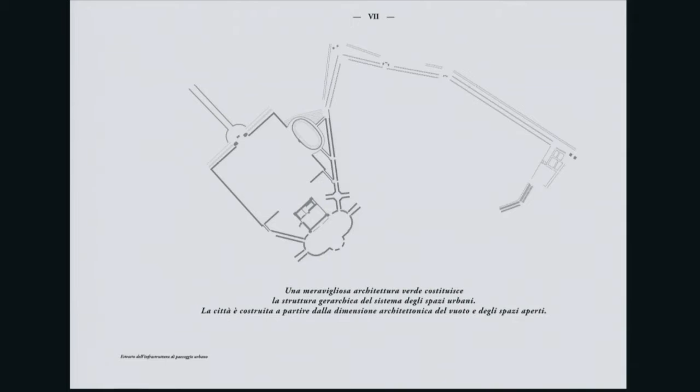This is a zoom on the part from Porta Venezia, close to the center, to the area of the castle. What is special is that the landscape system is made by trees, and they are not merely designing a line following the street, but producing a double or a 4-line system, which creates rooms instead of just being lines.

These are some studies we made, some elements. Many of you know Via Marina, for example.

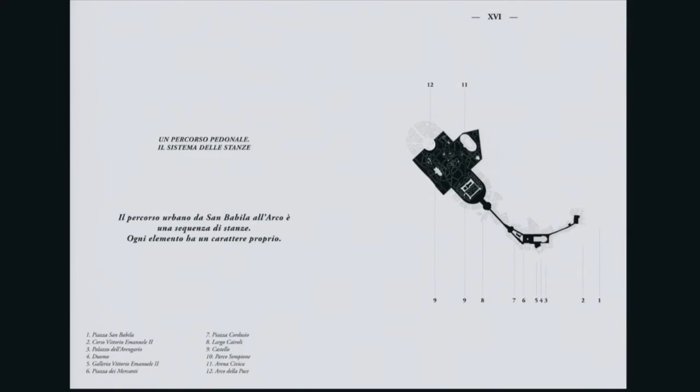Then we started an operation. The investigation was about finding the limit of the project. It was not just the problem of the road, as the administration thought—and we guess and hope they're not still thinking just about the traffic problem—but to find the dimension of the void, because we thought that in the end, void is the dimension and proportion of the urban space.

So we consider a huge area as a unique system, which is a strange space that goes from San Babila to Parco Sempione, made of objects in the void.

Historical examples demonstrate that this isn't a problem of us being obsessed with landscape, or about the antithesis between nature and artificial elements. The history of this place shows there's no contraposition—they were working together, with a special quality, character and atmosphere, even when it's a void made of natural elements.

It's a very urban space. These are other elements from Collezione Bertarelli.

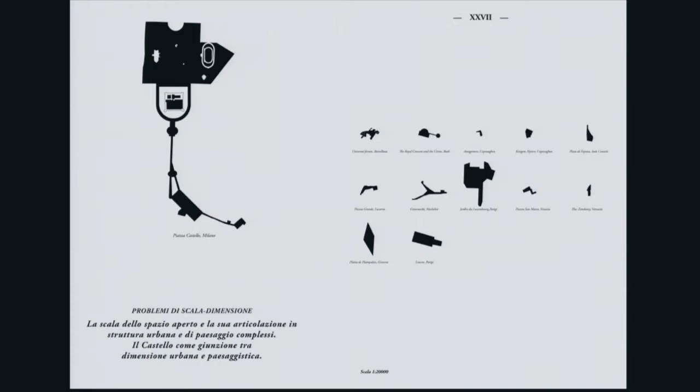Then we made an investigation about the dimension of that space, considering the huge area. On the right you see examples of different piazzas in Europe and the world, to set up the scale and dimension of our project compared to other cases, including the huge scale of the void compared with other void spaces.

This is the project, a three-dimensional vision. This is the existing situation, which is very linked to something we want to avoid—just the dimension of the urban furniture or element.

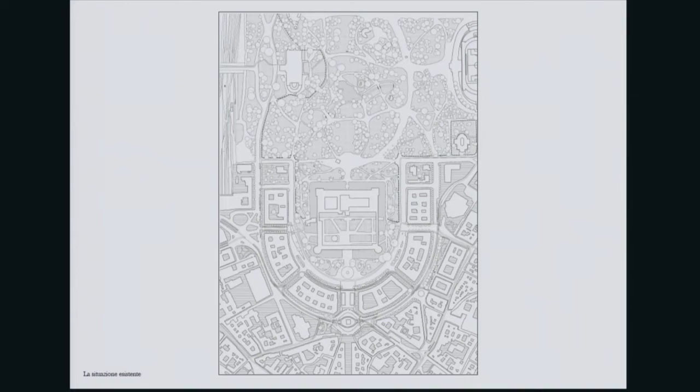The south side of the castle is actually a garden without any real quality, just made of small scale elements, while the Alemagna project is really finishing on the north side. We propose a unique element which connects all space using the void as a structure.

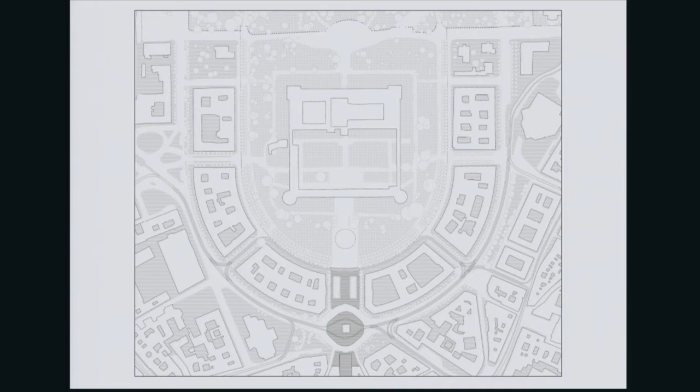We continue the element around the castle with 4 lines of trees, producing rooms and spaces to be lived in, and we left the void to be the real place. The history is kind of strange, because the consultation asked for a tiny project—just a 300-meter element—with the real problem being traffic, just to do it very fast for Expo.

That's why what you see here in the castle now is just the arrangement of a little space. What we proposed to the administration was to stop with urban furniture or fast, short, temporary development, stop wasting money, and to produce a project with an urban scale and urban perspective, also in terms of time.

I'll go very fast. These are some sections of the temporary arrangement and the definitive one.

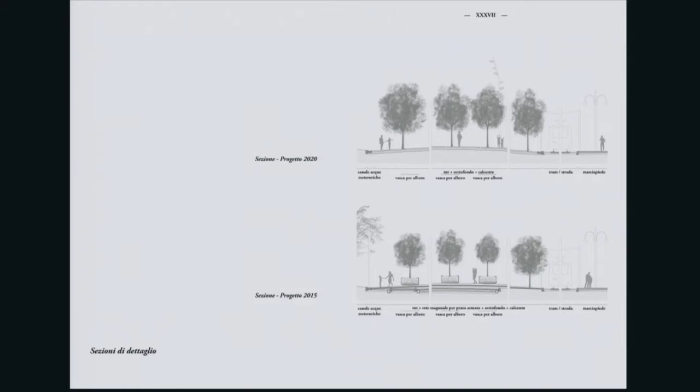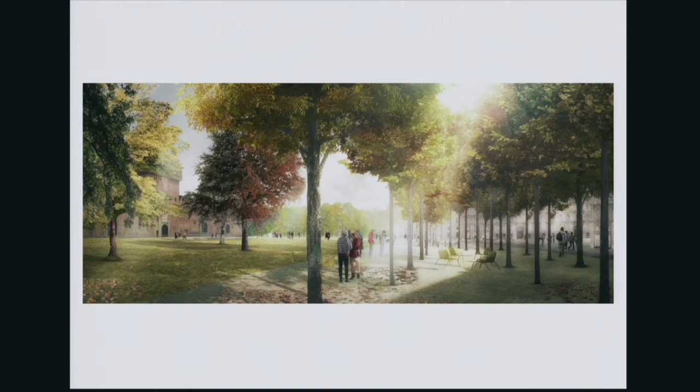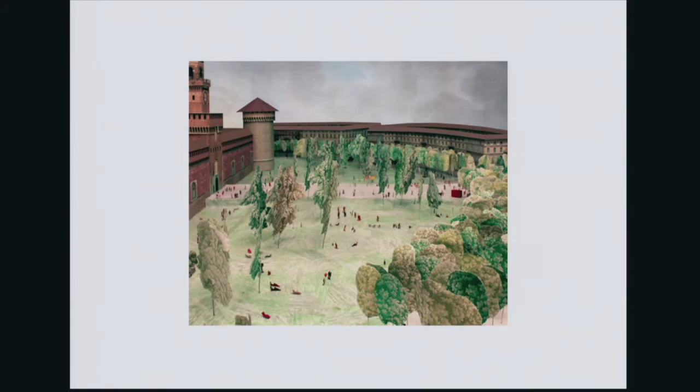It was displayed in the Triennale. It was a 1:100 scale model, 2 meters by 1.5 meters, to show the atmosphere and the relationship with material and space in real time.

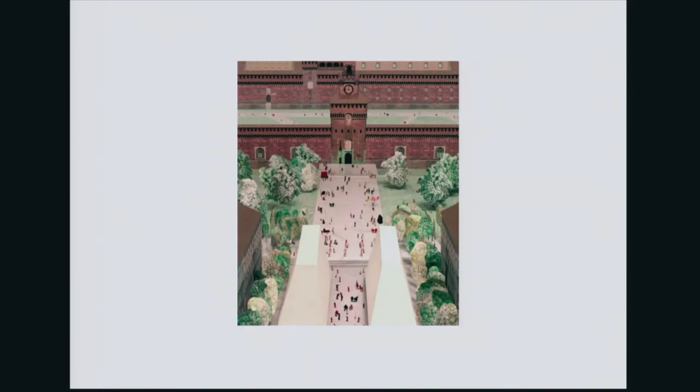Okay, this is the second project we'll show. It's a public project, a school. It's a competition we won about a year ago.

It was a restricted competition with an international jury, with Professor Magnago Lampugnani from Zurich.

The project is interesting in terms of the investigation about the same problem. They had a necessity which was a merely functional program, all given by a series of data and percentages in terms of use of space or dimension for each square meter for each child and so on. We decided to face the problem as an urban problem in a space without any urban dimension.

This is a new development in the northwest of Milan, close to Expo—it's Cascina Merlata. It's a typical urban space without any real rule or reference, with use of space coming from a modernist idea about using space just as a distance, without any real quality or naming of the space.

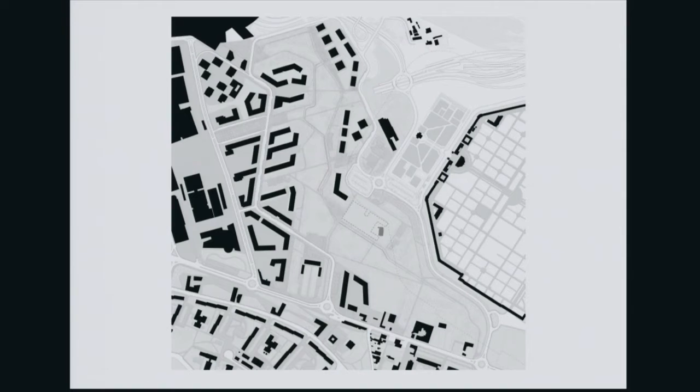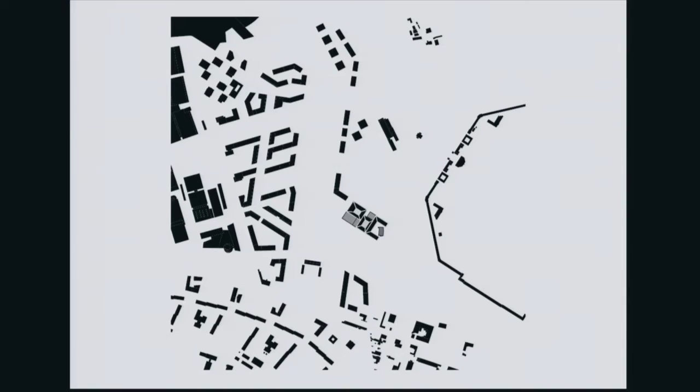The modernist idea in this area was usually to place one block in the center of a garden. Our idea was to give an urban atmosphere to the only public building of the area, which was the school, so we decided to work in the opposite way. Instead of producing an object lost in a void, we tried to give an urban presence, a physical presence and consistency to the object, taking reference from an urban block. In Milan, the Collegio Elvetico has examples of big structures enclosing space while having a strong reference for scale and physical presence with the city.

There was also a theme about the persistence of certain elements. We managed to keep one chimney from a former brick site that has been completely destroyed, because in the meantime they kept the chimney but destroyed everything else since the competition, in order to make room for thousands of buses for the Expo. This is the big Expo parking for buses, so the only element we could keep is the chimney, which you'll see is part of the project.

What we want to point out is about losing the relationship with the functions, which usually produce a relationship with typology and form. The form of the school is something given in many cases. Instead, we concentrated, like ancient cities did, on the morphology of the city and the quality of the space. There are three courtyards with different proportions and qualities, relating to different parts of the plan.

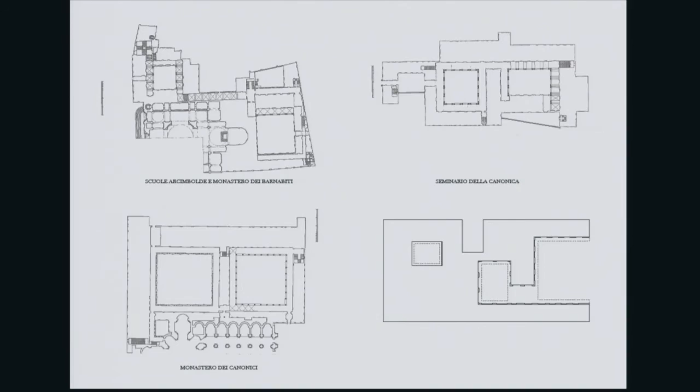What we were interested in, in this survey of buildings, was the fact that they have a big richness of interior spaces and complexity without being formally so complex. So we were watching, for example, how to enter the complex, where the stairs and main circulation of the organism were, and how the connections between the courts were managed. In some way we tried to steal something from the richness of these buildings and put it into this new organism, which is very compact.

It's something like a building of buildings - more or less five buildings stuck together in a way that they can be perceived individually but form an overall shape. You see in the color there are different colors: one is the kindergarten, another is the elementary school, and others are for ages 3 to 6, 6 to 11, and 11 to 14. That was the challenge - there are 800 children to be placed in this school, so you can imagine how complex the functional system is that has to support this form.

There's also a gym and a big canteen for all the children, so these functions are part of this big complex. In the ground floor plan you can see now how the dimensions of the courts vary, trying to be as rich as the historical references we talked about before.

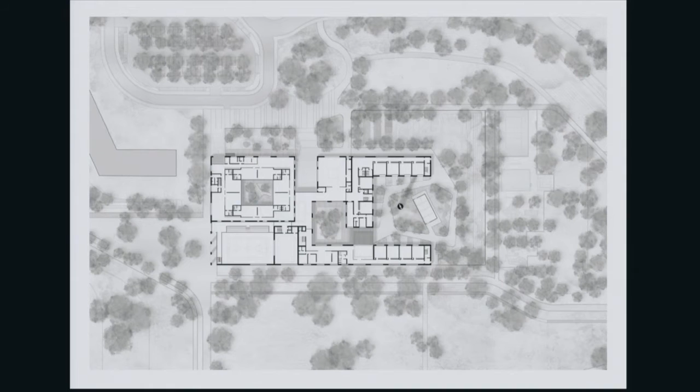In the north part you see the porosity of the entrance, then the court on the left side for the children of the kindergarten, and two courts connected through a portico. On the right side, you see the big court opening towards the landscape with the pre-existing chimney, which is quite a visual and physical reference. What we were interested in, as Gian Carlo mentioned, is that this building had to be very different from the Cascina Merlata complex, which was open and tall. This building had to be very low, with a low profile in the garden and the park.

Most of all, our strategy was based on the idea that the public building has to face directly the park. It has not to be an object detached from the public space, but has to be really on the edge of the plot. That was probably the main reason that led us to this kind of scheme.

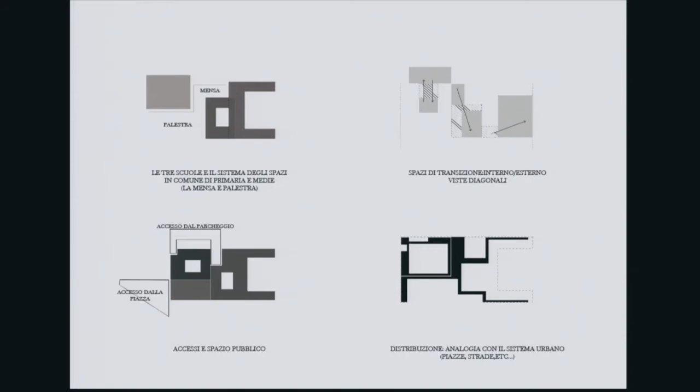These are the strategies we were showing you before about the richness of the spaces, the relation between the courtyards, the dimension of the interior circulation, and the multiplicity of entrances, and the idea that all three courts had to have a very distinctive and different character in terms of dimension and compression of the space. You see the small one for Scuola dell'Infanzia, the big one for Scuola Primaria, and then Scuola Media was a kind of middle-sized court.

A school is more or less a simple sequence of rooms, nothing more than that. These rooms had to sometimes face into a private, very intimate place, and sometimes could go outside to see the city and the landscape.

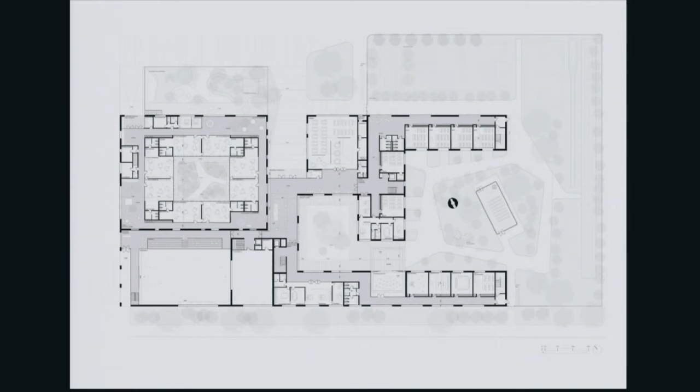All these concepts were organized in this plan, which I will not describe in detail because it's not so important now. But what's important for us is that all these rooms are organized in a very clear way, trying to face the necessity, as Gian Carlo was telling you before, of the acoustic, which is one of the main purposes of a school. Today we are totally obsessed by acoustic. Of course it's an issue, but sometimes things are much more than the necessity itself.

So we try to manage the acoustic in a way that the building itself was the main solver of this issue. Not to work with glass or other technical things, but to work with the form of the building, so the rooms are protecting themselves with the architecture.

This is the ground floor, this is the first floor. It's a two-floor building, and this is the underground level where there is the gym, which is more or less sunken into the earth to be more protected from the park.

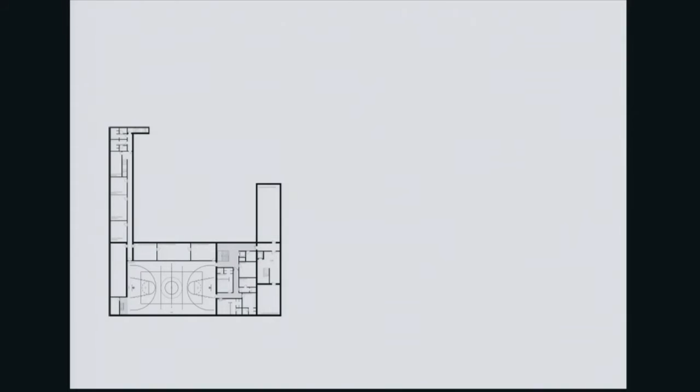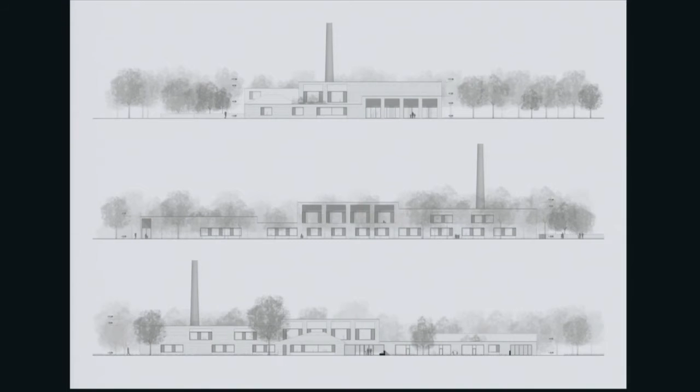In terms of the character of the building, we were thinking about having an organism that could have different characters. In the same way we were looking at historical reference buildings to have different characters: some places with a monumental aura of the public building, and some other places more intimate and private.

So we try to have a calm sequence of openings in these facades, selecting very few geometrical figures to make the composition, which is quite plain and peaceful, let's say.

In the section you see the inclination of the roof is the formal device that enables us to make the overall form consistent and blocked in a form. We have different inclinations, but more or less all the roofs try to be more figurative than the simple flat roof of the generic school we see around the city.

You see here the lower courtyard for the youngest children, then the bigger one, which is the entrance one, and then the big one with the chimney facing the park.

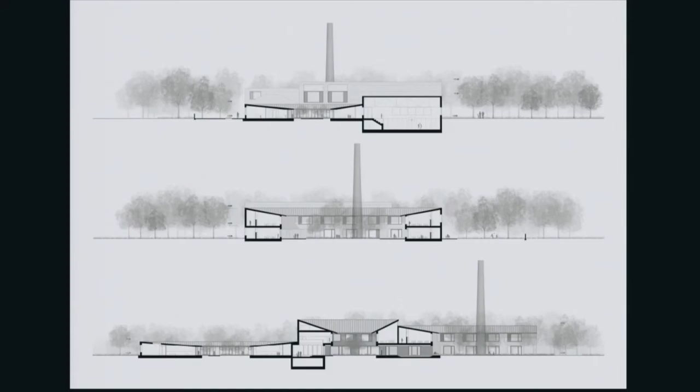This is the maquette of the competition that we made just to demonstrate this variation of these three big pieces and the other elements added to form an overall shape.

This is the entrance of the school, and over there is the park. In some way the building is occupying the entire plot with its own figure, rather than having the usual gardens you see in between the public building and the public square.

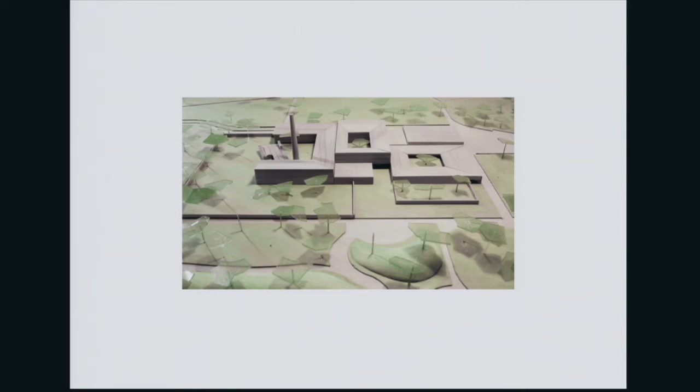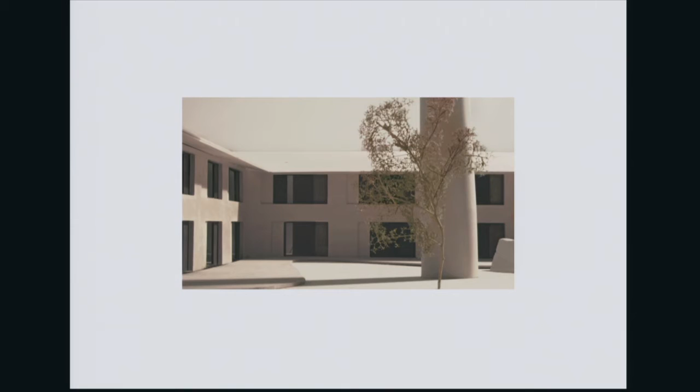Another theme we were interested in was a notion we also read in some reflections by English architects, about the schoolness—the idea that the character of the building has to relate to a background. The building must not emanate too much, but has to control itself, to allow the variety and richness of everyday life to be the starring and effective element of the overall image.

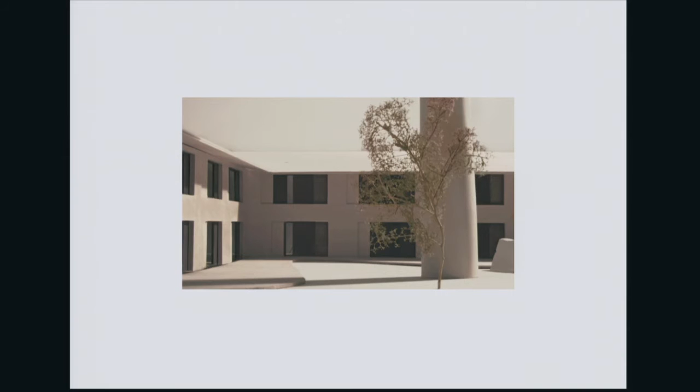In some way we tried to have very restful and peaceful facades, also in the courtyard. This is a big model we made of the large courtyard, showing the passage from the big courtyard to the medium one. We also tried to reduce the forms of the windows in order to have few elements defining the elevations.

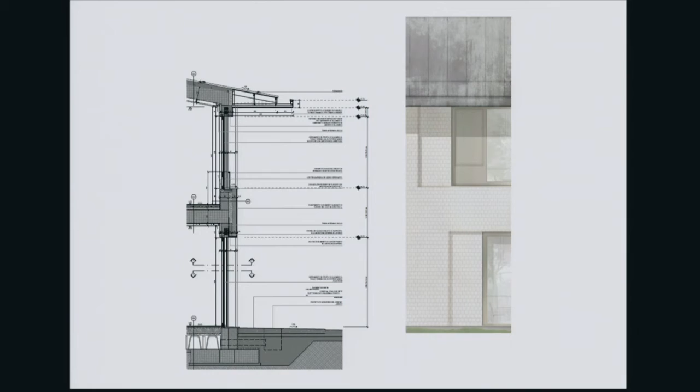The frames of these big windows facing outside are articulated in fixed glazed windows, as you can see here, and golden shutters, in order to enhance the richness of this very simple facade, which are always also working on the thickness of the wall.

This school is quite interesting because it's a place where the idea of connection between inside and outside is well resolved. It's a place called Via Marcona in Milan. We were also fascinated because it was a construction in which the presence of the material was quite strong. It was a reference for the choice of the constructing strategy of our project.

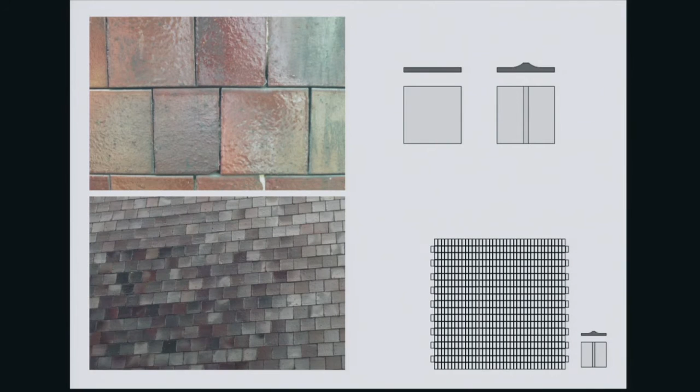Here you see some patterns of how the skin and texture of the clinker could be managed in order to vibrate and have a kind of enlightened wall with a very low and simple material. This material has a long tradition in Milan, and we saw wonderful school buildings in Milan. We thought it was a really good strategy to use it in a contemporary way.

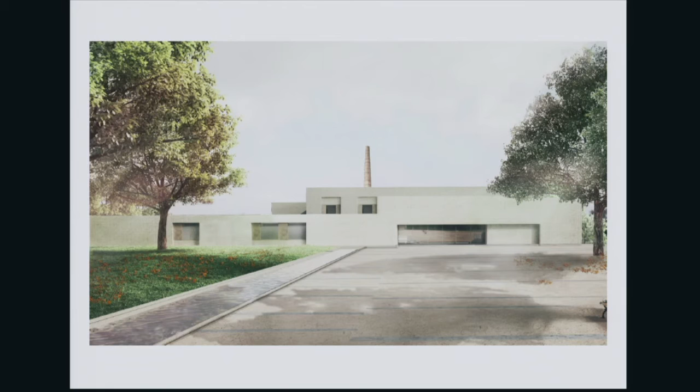And here you will see some images of the competition project that we won, as Gian Carlo was telling you, maybe a year and a half, a year ago. And we are now developing the executive drawings and the drawings for the approvals.

So this is the facade of the gym, probably the more public facade of the building, because it faces a big square inside the park. And on the left side, you see the articulation of the volumes that I was telling you before. The mass, it's a brick one, a very

vibrant material. We would like this material to give richness to this very flat and calm elevation. The golden shutters, as I was telling you before, the entrance of the building, and the canopy of the entrance.

The biggest court facing the chimney, with this idea of having an articulation of the wall to enhance also this tectonic quality of the wall.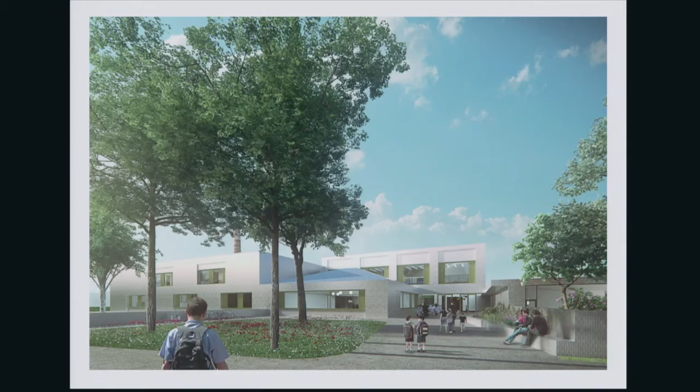And the entrance, which is characterized by the canteen, which is a little house, trying to lower the scale of the building and to have a more intimate space here for the entrance.

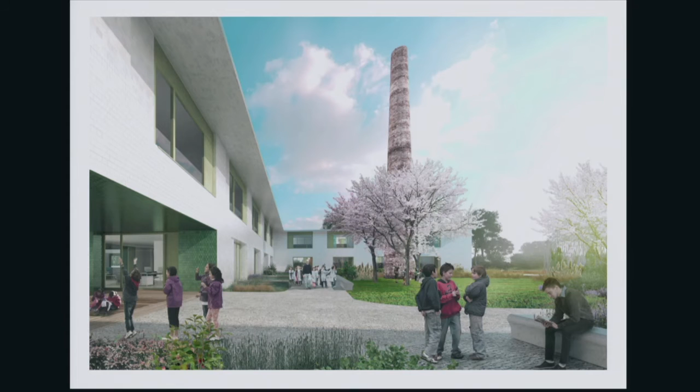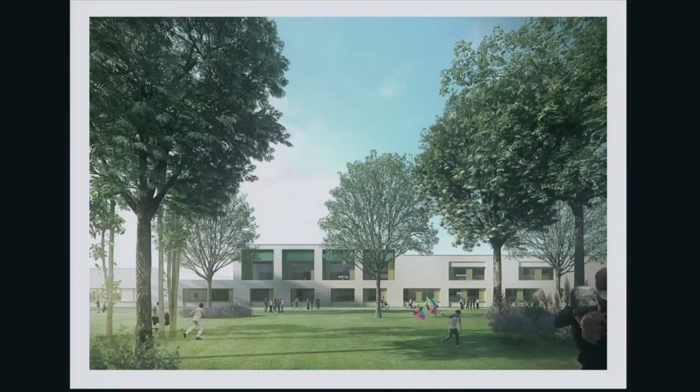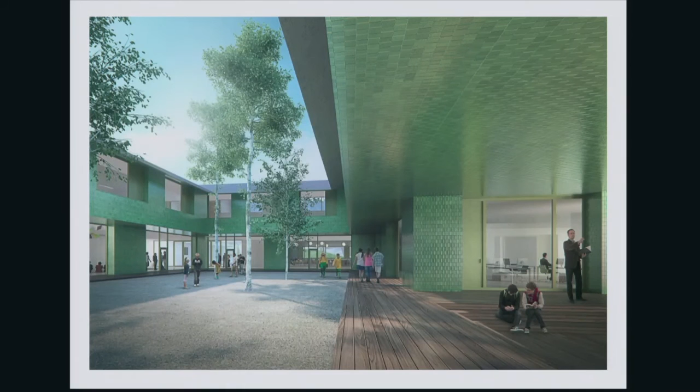And then as soon as you are in the grand courtyard, you have a passage where the material, which is the same, changes color, as we were seeing before in these spaces. It gets more vibrant and more rich, and it leads you to the central court, which is the heart of the building, and it's also the most expressive one in terms of cantilever and in terms of compression of the space. And over there you see the atrium of the building.

Okay, the last project, because it's very late. This project has been completed a few weeks ago, and it's also a competition that we won two years ago, and the process was very quick because they wanted to open the building for the expo, and they succeeded. It was a successful project, though we had to face this rhythm with some choices that we had to manage some way.

It's the place. It's quite extraordinary because it's one corner of the grand space which is fronting the Stazione Centrale. So it's a piece of a bigger building that was left here. So it was about demolishing this piece of building and making a new one that was more efficient in terms of thermal insulation, structural consistency, and all the other necessities that a hotel has to have nowadays.

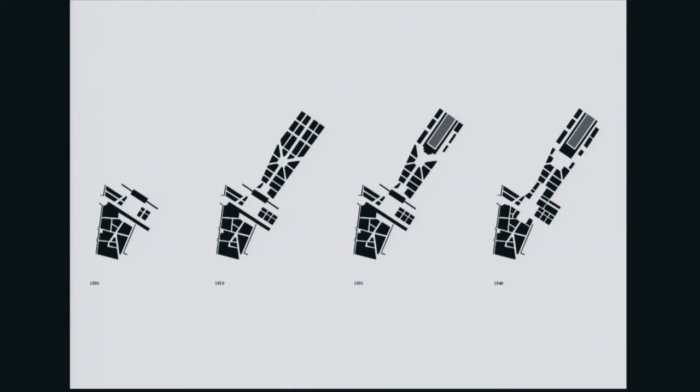This piece is at 56. So it was... okay, this is this place, as you see. It's one of the pieces that are composing this system, which is quite a monumental one.

You see here a succession of steps from the beginning of the century to nowadays, in which you see how the space, the void, changed in terms of dimension, in terms of compression, and at the end it's a quite interesting and monumental system that sometimes is a little bit pompous, as we see in Via Vittor Pisani, but for some other purpose it's one of the big pieces that the city built after the war.

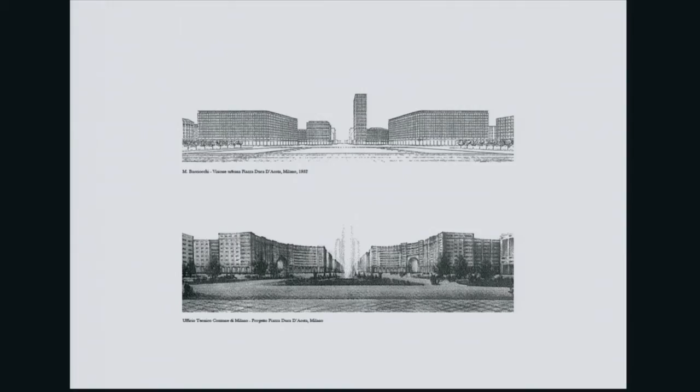In this interesting image, on the top you see how Baciocchi was thinking this entrance of the city. It was something like a homogeneous pattern that was interesting across all the buildings that he was designing, trying to make a very monumental but also homogeneous and sober entrance to the city. So we were attracted by these images, not because we had to historically prove our project, but sometimes it seems more important to understand the pieces than the scenario where you're working, to have good ideas to make your own project.

So we were, for example, looking at Muzio's project for the entrance of the city, and the place where now there's one Muzio building and one other building in Via Turati. And then we were also looking at some other references from those years that were managing this idea of enhancing the monumentality of the facade and the presence of the urban figure, in terms of double-heighting the floors, or connecting lower buildings on the side street, or having different heights depending on the function and depending on the overall design. So all this was re-elaborated and thought through a bit.

Here you see the building that we were working on. So you see the color changing in this little strip of building. This is the structural joint where we had to stack and graft our piece.

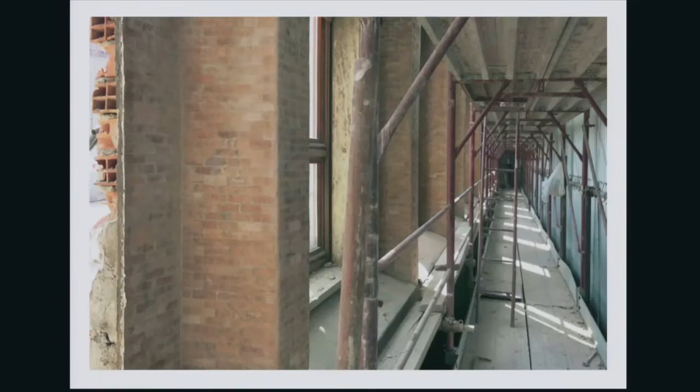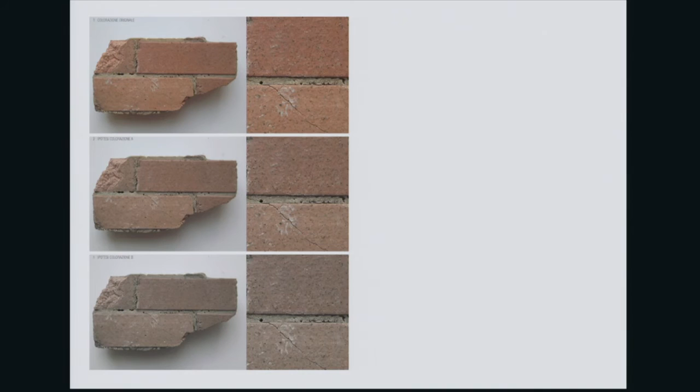Then when we demolished, we saw that we could measure things, and it was quite nice for us to see how it worked, and also the color, to manage the color. We had to manage the relationship between the pieces that remained and the new piece, so managing the color could guarantee a better involvement of the new in confronting the pre-existence.

So this is the strategy, more or less. It's something like an abstraction of Baciocchi's scheme, the idea to double the height of the figurative element and to abstract a bit the device of the glazing and the spandrel and the vertical elements. So we tried to manage this elementary element to be the expressive principle of the new building.

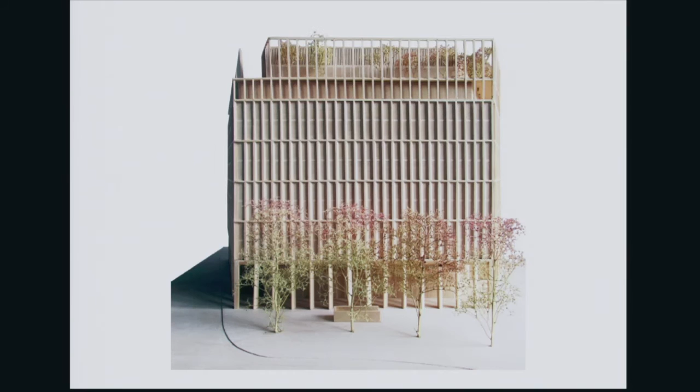And then we were also trying to understand the exact dimensions in terms of proportion, in terms of depth of the facade. Okay, this is the maquette that we made for the competition, and the image.

And this image was, let's say, more or less our statement, which was putting together different things - the materiality of the Bacciocchi building and also the verticality of the structure of the tower that we are facing.

It was something like making a resonance of different things and putting it into a new piece, not for nostalgia, but because we think that sometimes this kind of reflection can be generative to have a new design in continuity with the city, with the surrounding city.

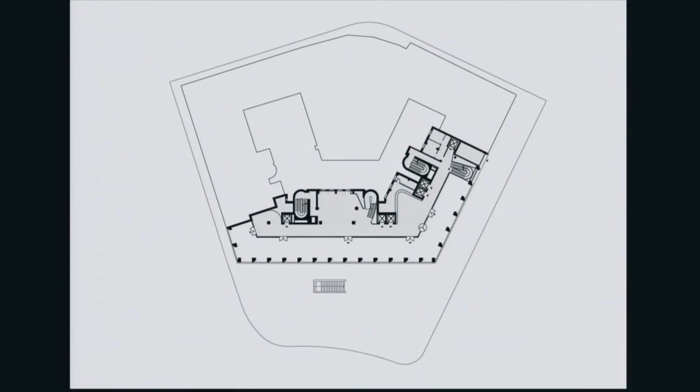The plans are quite generic. The challenge was to manage this thickness of the building, which is really thin.

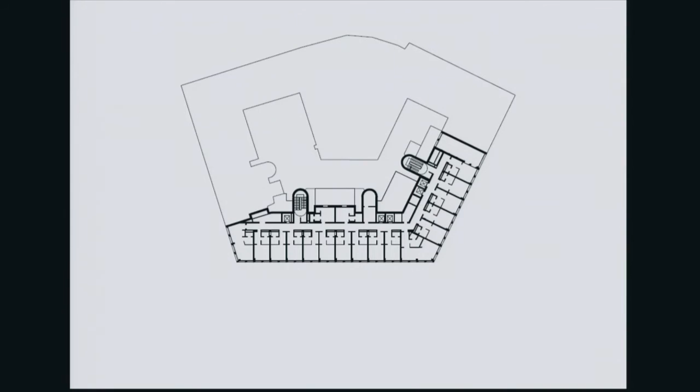So the challenge was to put most of the rooms in front, of course, facing the public space, to engage with the quality of the grand square, and to put all the services in the back in order to concentrate all the problems on the back. It was very pragmatic, and the only thing was to guarantee the standards, since hotel necessities are really strict.

So in some way, this problem of the organization of the typical plan was a secondary one, and leads us to find the qualities of the project in the elevation, in the construction of the facades, and in other elements, rather than working on the plan, which sometimes is worthwhile. But in that occasion, the section and the plan were not given, just quite generic, which happens a lot in the city.

So this is the 9th floor, and then the rooftop where it was supposed to have a wonderful bar, but unfortunately the business plan said it was a suite, not a bar. It's a pity.

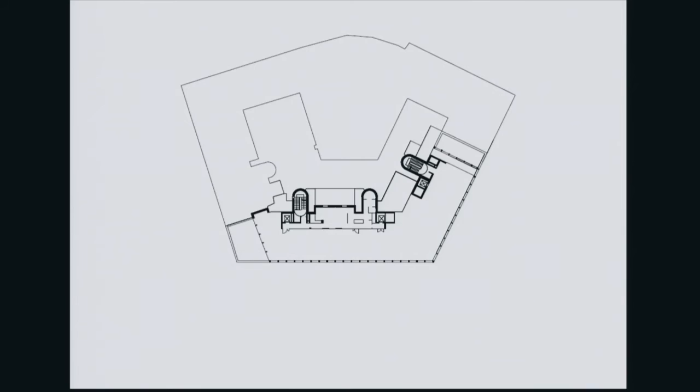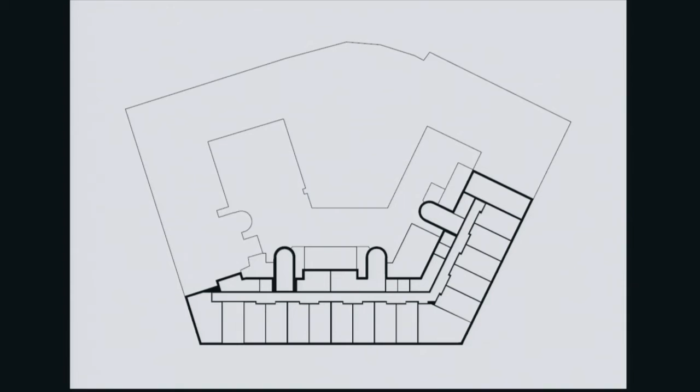Okay, so you see the very simple strategy of the plan, the different dimension of the facade facing the square, this one, and through Via Napo Torriani, the secondary street, managed by changing the base of the rooms and of the structural model.

So in some way it seems everything equal, but it's different - the dimension of the rooms and the structural base is quite different.

And here you see the richness of the spaces of the rooms, which was not a typological choice of ours. It wasn't generated by wanting a suite, a junior suite or something like that, but was the result of having rules and then engaging these rules with the morphology of the place.

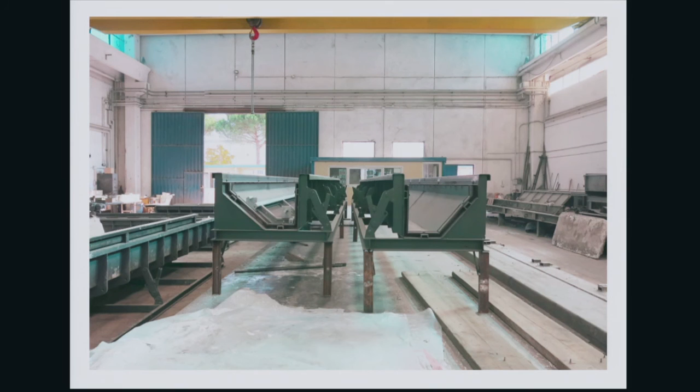It's a glass reinforced concrete element, made precast with this huge metal element, made in a certain way - it's precast, but it's a kind of art craftsmanship. It's quite artful. So not everything is equal.

You will see from the photo that also the color and some details are - we like this kind of imprecision of the precast element. This was the mock-up.

I didn't tell you that the overall design is made by a 3-floor portico and 4 double floors, then a single floor on the 9th floor where there are suites, and then another double floor for the suite of the terrace, which was providing us an overall element of conclusion of the building, also in terms of protection of all the plants.

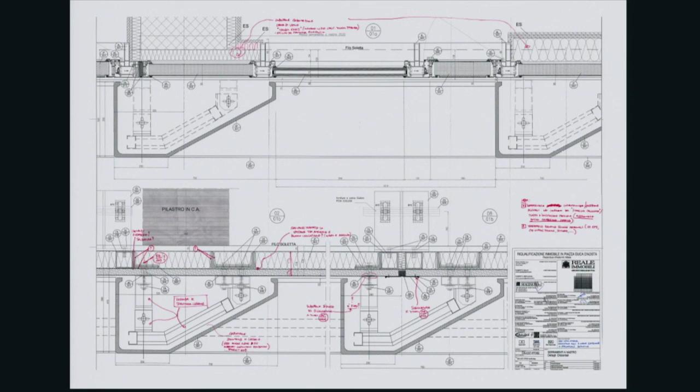As you can see here, every 2 floors this element is thinning, evoking the vertical structural thinning of the tower that we have in front of - the Pirelli Tower.

So as I was telling you before, the abstraction of the element - also here the glazed element is fixed, and the openable part is an opaque one. The portico with this vertical element is organized by vertical and horizontal elements which are exterior to the glazed facade, not interior like a generic one - just to have a stronger presence of the structure of this 9-meter vertical plane with the terrazzo.